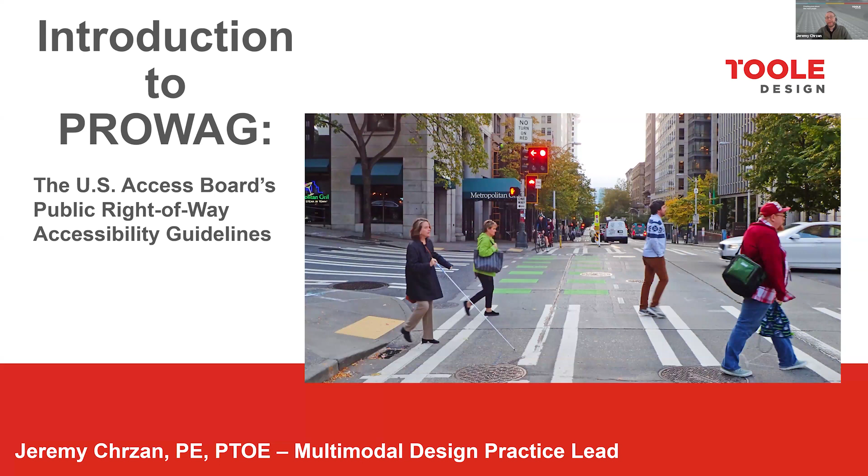So thanks for having me. Elise already said what I'm going to talk about, so I'll jump right into it. I'll start with the background, then give you an overview, dig into the details, and then talk about the relationship to the MUTCD. I think we have about a half hour slated for questions, so hopefully that's enough. If not, feel free to follow up with me afterwards. Happy to answer questions.

So the background. PROWAG is a weird acronym. It stands for the Accessibility Guidelines for Pedestrian Facilities in the Public Rights of Way. That's sort of a flipped acronym, which used to stand for Public Rights of Way Accessibility Guidelines, but that's where that comes from. PROWAG establishes the minimum accessibility guidelines for design, construction, and alterations of permanent and temporary pedestrian facilities that are located in the public rights of way. And some definitions there: pedestrian facilities refers to any structure, route, or space for pedestrian circulation or use. Public rights of way refers to any street, any highway, or an independent easement, such as where a shared use path would be located.

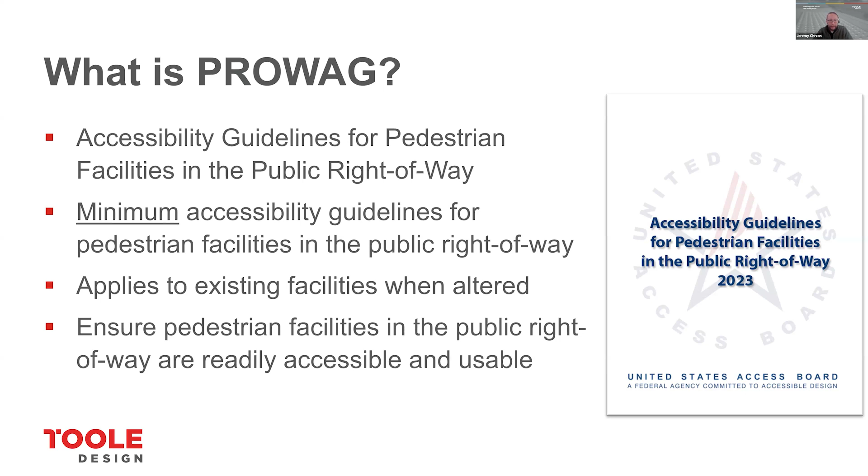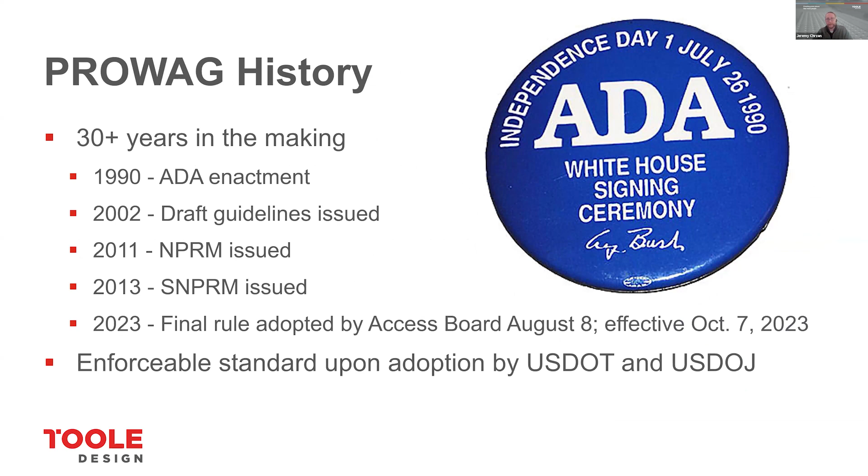So a little history here. The requirements for accessibility are long-standing. They date all the way back to 1973 with the Rehabilitation Act, which said that activities that received federal funding can't discriminate against a person with a disability. Then in 1990, we saw the adoption of the Americans with Disabilities Act, or ADA, which extended that requirement to all public facilities. Since 2002, there have been various drafts and versions of PROWAG that have been adapted and modified based on the public commenting process. In 2013, that was updated to include some guidance on shared use paths, and then it's taken all the way until August of 2023 when the US Access Board finally adopted the final rules for accessibility guidance.

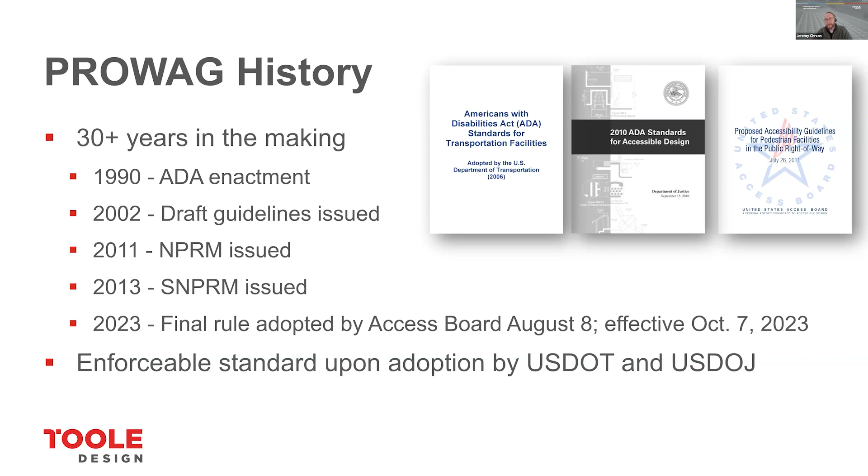It's important for you to understand that this guidance is only going to be enforceable once it's adopted by the US Department of Transportation and the US Department of Justice. What does that mean? It means that the DOT and the DOJ are the agencies that are tasked with enforcing accessible design guidance from the Access Board. Since those agencies have not yet adopted it, it's not yet enforceable. But in reality, we should all still be using PROWAG for our designs regardless of its enforceability, given that it represents the most current best practice for accessible design. Remember, accessible design is intended to address issues of discrimination against people with disabilities. So following PROWAG will help us to ensure that we're not discriminating as part of our designs.

So why does PROWAG matter? Well, it'll become the first national level enforceable design guidance for accessibility and the public rights of way. And to be clear, the ADA already mandated that streets needed to be accessible regardless of the presence of specific design guidance, but the adoption of PROWAG now provides that guidance to address accessibility.

And it's important to recognize that accommodating people with disabilities is not about accommodating a small minority of the population. According to the CDC, in 2016, at least 26% of the US population had a long-term disability. And beyond that, most of us will have a temporary disability at some point in our lives, whether it's a broken bone or recovering after surgery. There are a myriad of things that happen in the course of our lives that can give us a disability.

So if we're following PROWAG, we'll ensure that the public rights of way are going to provide equal access to jobs, education, healthcare, recreation, and all the other opportunities and experiences that we as humans need or desire. But PROWAG also benefits people who don't have disabilities. So for example, if we're providing curb ramps, that makes it easier for somebody pushing a stroller or deliveries using a hand truck to navigate between the street and the sidewalk environment.

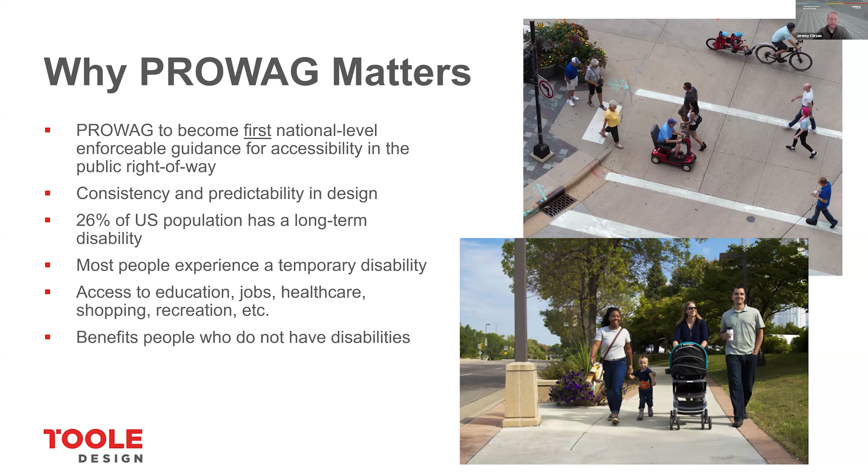So let's talk about what's actually in PROWAG. First, we'll talk about the structure of it. PROWAG is set up with the same structure that the previous drafts included. So those of you that had been using those previous drafts should be pretty familiar with it.

Chapter 1 identifies the purpose and applicability of PROWAG, its effects on existing facilities, and deviations from those guidelines. It also includes a lot of definitions and terms that are used throughout PROWAG, and it's worth noting that the Access Board added a lot of new definitions in the approved version. So it is worth reading those so that you understand the terminology that they use throughout the document.

Chapter 2 discusses the different scopes of projects, including new and altered facilities. It discusses temporary and permanent facilities. It's also where you learn about anything that's not covered in PROWAG, things like structures and other elements that might need to comply with the ADA or the Architectural Barriers Act.

Chapter 3 is where we start to see the details for facility design. And then finally, chapter 4 is supplemental details. So that's where you're going to find discussion about things like protruding objects, operable parts like push buttons, clear space requirements, things of that nature. So it's important to understand that the content from each of these chapters works together to ensure that we're addressing the noted guidance and the noted requirements.

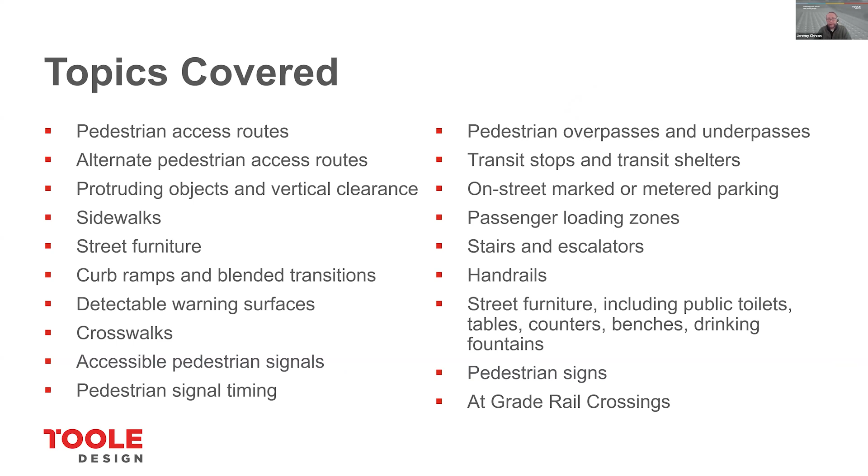But it's also important to recognize that PROWAG has been in the making for over 20 years, and there's been a lot of new innovations that are occurring in the public rights of way that are simply not covered in PROWAG. That includes things like the design of separated bike lanes, floating bus stops, shared streets or spaces, electric vehicle charging stations, and other new or less conventional street designs like flush or shared streets. They're not discussed in PROWAG. Quick build projects that use flex post curb extensions for pedestrian crossings are also not discussed.

And although they do provide guidance on the use of detectable warning surfaces, other tactile walking surfaces that are in use throughout the country are not discussed, things like tactile directional indicators or trapezoidal delineators. Also not discussed are the needs of people with intellectual or developmental disabilities. That's an important consideration that's simply not addressed in PROWAG. PROWAG mostly focuses on addressing vision and mobility disabilities.

Also not discussed is engaging with people with disabilities in the street design or street planning process. This is something that we've worked on a lot at Toole Design. Things like using tactile maps when you're engaging with people with a vision disability so that they can understand what we're talking about and provide meaningful feedback. The importance of leading public meetings and workshops with people with disabilities included and how we address their needs as part of those meetings. These are not things that PROWAG discusses.

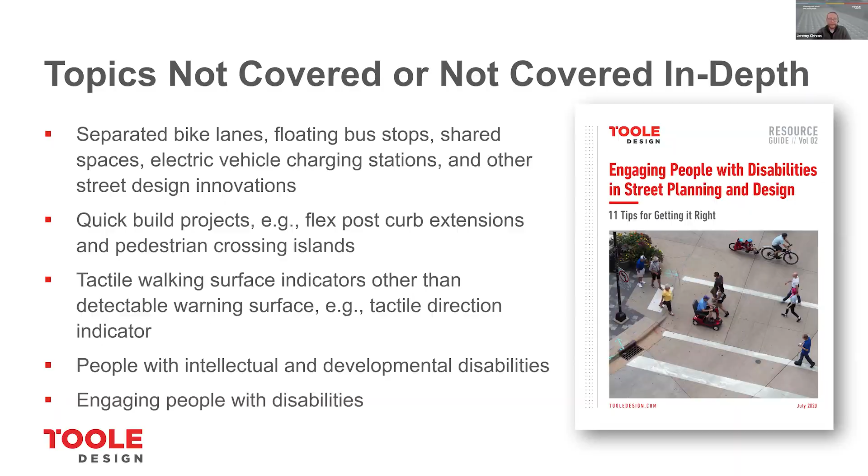All right, so let's get into the details. I'll focus on the key changes from the previous drafts to what was ultimately approved in the adopted version.

Let's dive in. In Chapter 2, the Access Board had received a lot of questions and comments about what constitutes a new construction project as compared to an alteration or an added facility. Those were terms originally used in the drafts, adapted from ADA guidance for accessible buildings, but those aren't terms that are easily applied to the public rights of way.

So the approved version of PROWAG defines new construction as any work on undeveloped land, things like a greenfield condition. In those cases, construction must fully comply with the accessibility guidance of PROWAG. The only exception for greenfield conditions is spaces used by service personnel, things like vaults or tunnels, which don't need to comply.

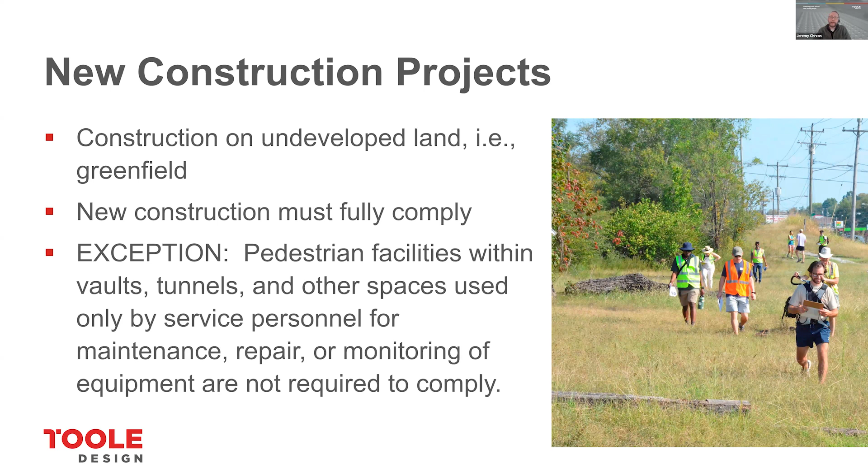For alteration projects, those are projects occurring on already developed land, meaning land containing buildings, pedestrian facilities, roadways, utilities, or other elements. For example, if we have a road that doesn't currently have sidewalk and we're adding sidewalk and curb ramps as part of our project, that project would be considered an alteration project.

In an alteration project, we're still expected to comply with all requirements of PROWAG unless there are existing physical constraints that make that technically infeasible. These can include things like underlying terrain, underground structures, adjacent developed facilities, drainage, or significant natural or historic features. It's worth noting that availability of existing right-of-way was previously listed as a potential physical constraint in older drafts, but that text was removed.

That means we might need to acquire right-of-way to build something fully compliant, and we need to do our due diligence to acquire that right-of-way or an easement to design in full compliance. And when we're not fully compliant with PROWAG, it's essential to document why that fully compliant design is technically infeasible, noting all the alternatives considered.

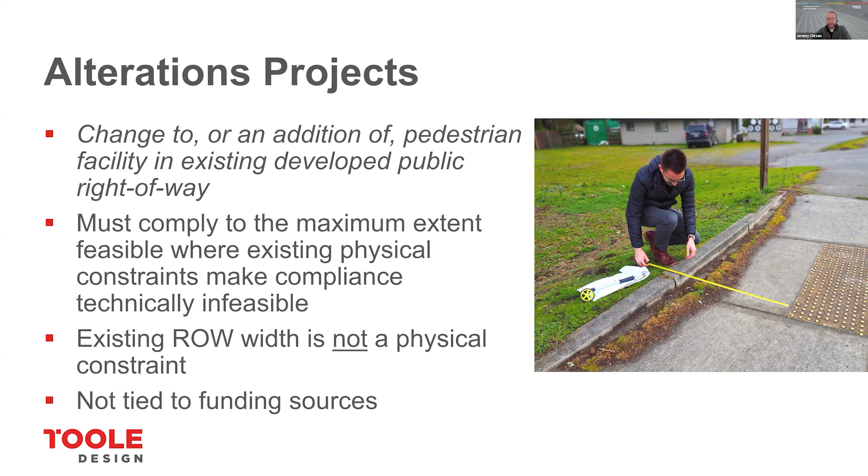I know a lot of DOTs have specific forms for documenting technical infeasibility with curb ramps, but really we should be doing that with all design elements that are not fully compliant with PROWAG.

Some other changes: the previous drafts included advisory statements. These were removed or otherwise incorporated as part of the design guidance. The issue with advisories is that although they provided useful information, they were not enforceable and therefore were ultimately removed from the final version.

The previous drafts also simply made reference to the MUTCD, but now content is directly added in PROWAG. For example, topics like accessible push button requirements at signals or requirements for alternate pedestrian accessible routes are now directly covered in PROWAG rather than simply referencing the MUTCD.

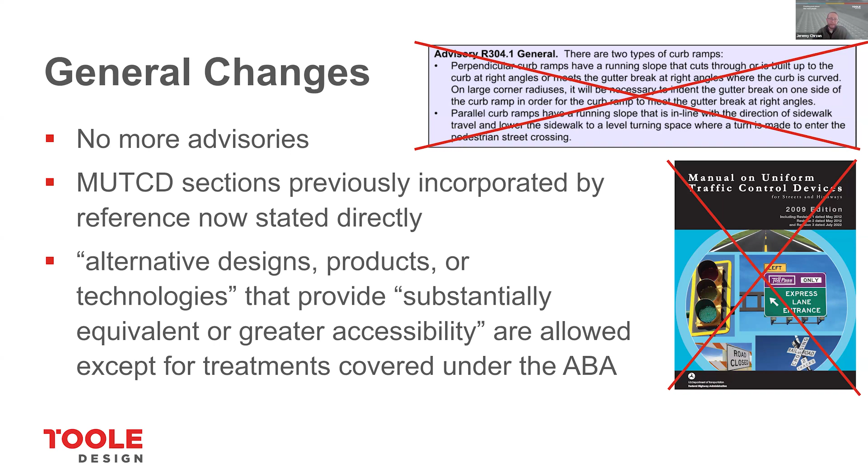The approved PROWAG also clearly specifies that alternative designs, products, or technologies that are substantially equivalent or provide greater accessibility are also allowed as part of PROWAG. Things covered by the ABA would require a waiver from relevant oversight agencies on those specific issues.

When we're designing work zones, pedestrian accommodations still need to be provided that offer the same widths and slope requirements as a permanent facility. So when doing a pedestrian detour, we need to be thinking about the widths and slopes of those alternate routes.

Although much of the updated content in PROWAG was pulled directly from the MUTCD, there was one significant change: the addition of a sign at decision points for pedestrian detours, noting that the sidewalk is closed ahead. The new requirement is that you need to provide passive detection, a motion-sensing activated sign that provides audible messages or some other non-visual form of communication at that decision point.

So while it's always common to put up a 'sidewalk closed ahead, use crosswalk' sign, now we have to have a motion-activated sign. The importance of this is because people who can't see can't read the sign, so they weren't previously provided sufficient information on how to navigate a pedestrian detour.

I know that's probably a new product many of you aren't familiar with, so I've highlighted on the slide that Minnesota DOT already has two approved products for this purpose, one with a push button and one that's motion activated. I've also heard there are a few new products coming onto the market in the next few weeks, so I expect this to ramp up now that PROWAG has been adopted.

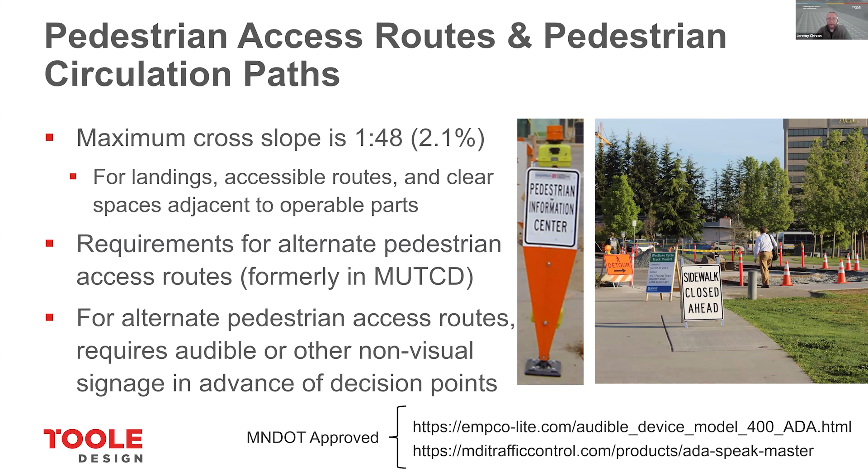PROWAG also provides guidance on the design of curb ramps, noting that you need to provide a curb ramp or blended transition for each crosswalk, including unmarked crosswalks, or you can provide a single blended transition that spans over both of those crosswalks on an intersection corner.

It clarifies that a landing is only required when a change in direction is occurring. For example, at the tops of some curb ramps where you're changing direction, you need a level landing. It also clarifies that a 4 foot by 4 foot clear area is needed at the bottom of a curb ramp, and it's important to recognize that those terms are different. A landing is different than a clear area. It's simply a space in the street that makes maneuvers in the street possible.

PROWAG also provides options for installing a transitional space at the bottom of a curb ramp or blended transition. That's specifically if the change in slope exceeds 13.3%, you basically need this 2 foot transition zone so that a person's footrest won't bottom out as they transition from the sidewalk to the street.

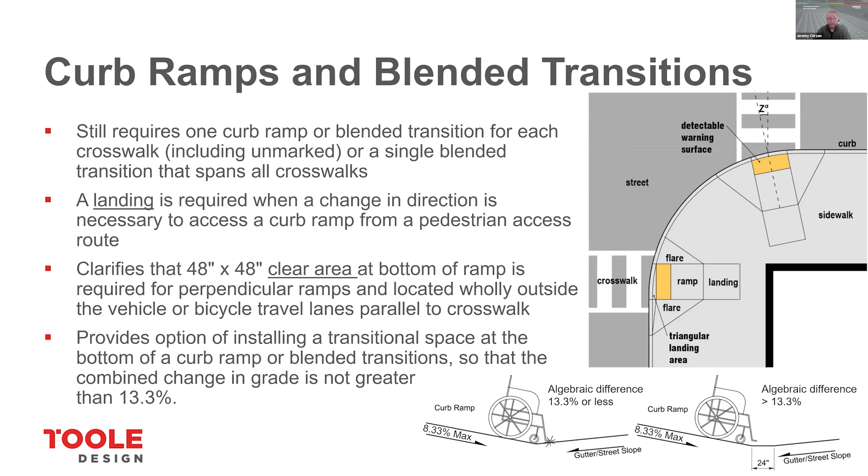So a landing is required where a pedestrian needs to make a change in direction, which facilitates their ability to make a turning maneuver. But there's some guidance in here that I think is a bit misunderstood. What PROWAG actually says is that the slope in the direction of the curb ramp needs to be 2.1% max. That 2.1% is actually a change from previous drafts, which originally only required a 2% slope - minor, but worth noting. But it also says that the slope in the direction perpendicular to the curb ramp simply needs to be less than or equal to the ramp cross slope.

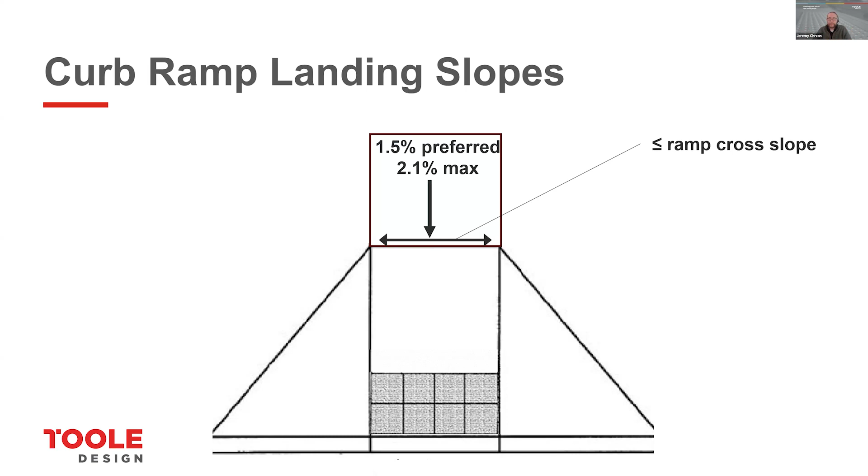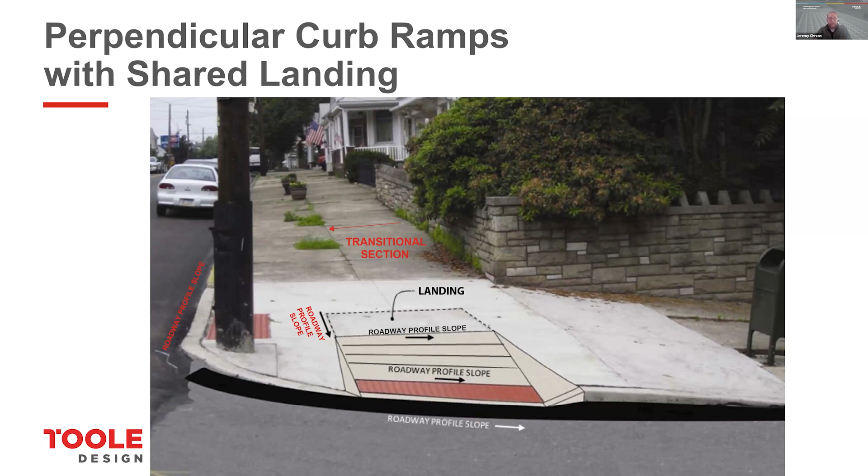Also recognizing that detectable warnings typically come as a rigid panel, so they also can't be warped on a curb ramp. This is a change from what many standard details show, so it's important for us to recognize that the landing should match the roadway slopes, and any transitional warping should occur as we make the tie-ins to the existing sidewalk.

PROWAG also provides guidance on the grade breaks for directional curb ramps, recognizing that they need to be perpendicular to the path of travel for a pedestrian. To accomplish this, we often need a triangular landing area at the bottom of the curb ramp that again can't exceed 2.1%. We will get into more discussion about detectable warnings shortly, but it's worth noting that for directional curb ramps, there's two different configurations.

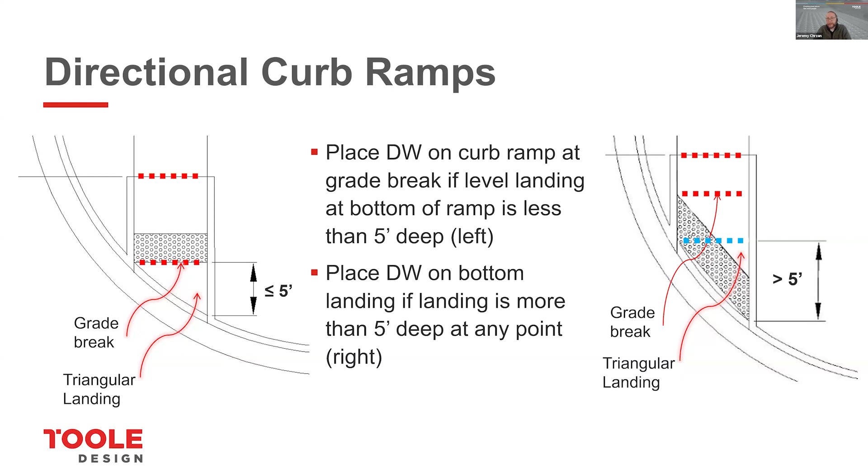PROWAG also provides guidance on the design of blended transitions. It notes that if you have a sidewalk that wraps around your intersection corner, we need to provide a bypass area that has a slope no greater than that 2.1%. That will allow a pedestrian to navigate around the intersection corner without having to interact with the blended transition.

And then finally, PROWAG says that a single diagonal curb ramp is only going to be permitted if two ramps or a blended transition are technically infeasible. Diagonal ramps have this problem that they don't align a pedestrian with their path of travel, and those designs require them to make a turn in the street that's not really desirable.

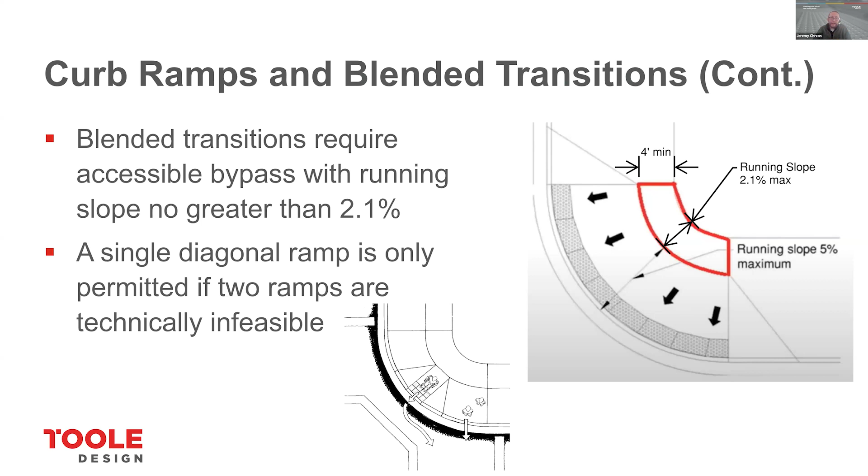Diagonal ramps also have their own challenges, since if and when you're providing them, the clear space that's provided at the bottom of that ramp must be outside the path of travel of any general purpose lanes or any bicycle lanes. So it's really hard to design them and be fully compliant.

Another change from the previous draft is the use of detectable warnings, specifically at stop-controlled driveways. It notes that if you have a driveway with a stop or yield sign, or it has a traffic control signal. If that condition exists, we need to provide detectable warnings across those stop or yield controlled driveways. I'll also note that there are many stop signs installed on low volume driveways that really aren't warranted. So as we're assessing and making revisions as part of an alteration project, we should also assess whether it's actually a higher volume driveway that warrants the use of a stop sign, and therefore is important to provide that detectable warning guidance.

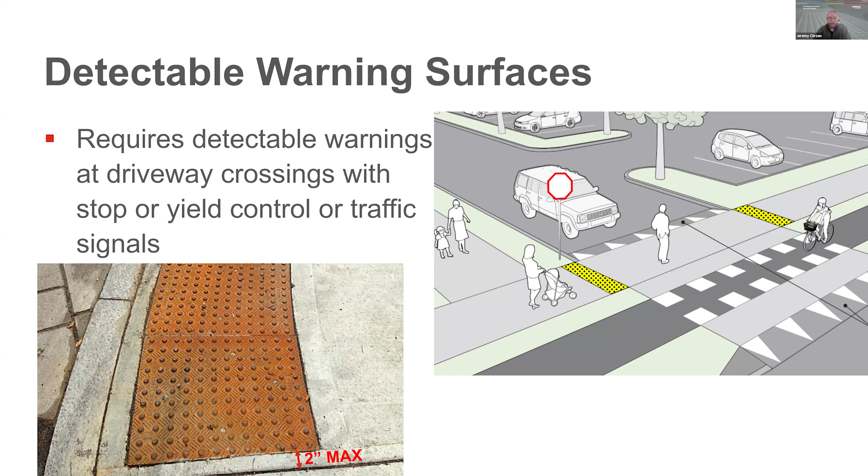Previous drafts also said that detectable warnings needed to cover the full width of a curb ramp when provided. However, they slightly modified this guidance to address issues of constructability, noting that we can provide up to a 2-inch concrete band on the edges of our curb ramps to ensure that the panels are appropriately set into the concrete.

Previous drafts of PROWAG also required the use of detectable warnings on all curb ramps, including those that access accessible parking or accessible loading spaces. In the previous drafts, it basically explained that detectable warnings are not a wayfinding tool, and they're simply used to warn a pedestrian that something is changing. However, the finalized, approved version of PROWAG changed this to now say that detectable warnings are not required.

Now, it's important to read that explicitly. It says they are not required, but it does not say that they are prohibited either. So as we're thinking about standardizing our designs, we need to ensure that we are applying a consistent approach, that either we are going to include them or we aren't, so that can be used throughout our jurisdictions.

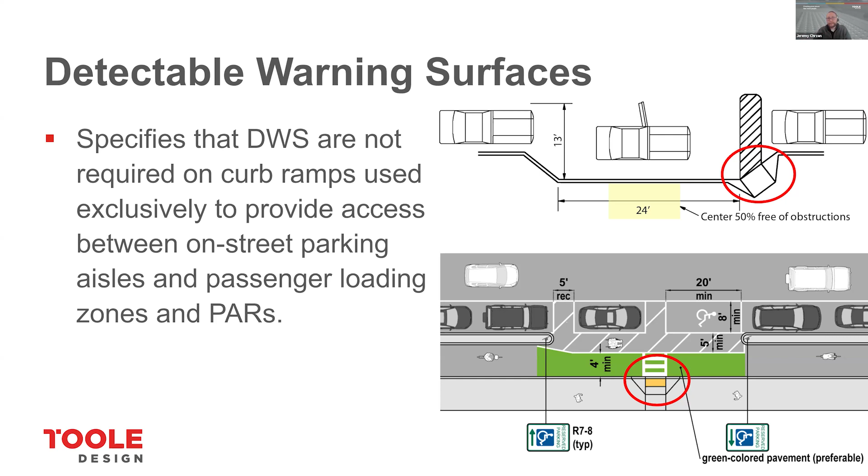For the guidance associated with accessible parking spaces, they also made some revisions here, noting that the dimensions of an accessible parking space need to be 24 feet long by 13 feet wide. In the previous drafts, it simply said that you needed to provide an 8-foot by 20-foot parking space with a marked accessible aisle.

If you read the preamble for the approved version of PROWAG, the Access Board explained that this change is to increase the spaces and account for the different uses of an accessible parking space - that essentially some users get out of the driver's side of their vehicle and therefore want to park close to the curb. Others are getting out on the passenger side and will park in line with other cars, and their accessible aisle is between the curb line and the vehicle itself. So by marking it as 24 by 13, it accommodates all the different uses, as opposed to in the past when some drivers actually needed to park in the marked accessible aisle.

PROWAG also says that you need to provide a 50% clear space along the curb, so that a vehicle that does need to pull up to the curb and deploy a ramp doesn't have objects like parking meters and things like that which would physically prevent them from deploying the ramp.

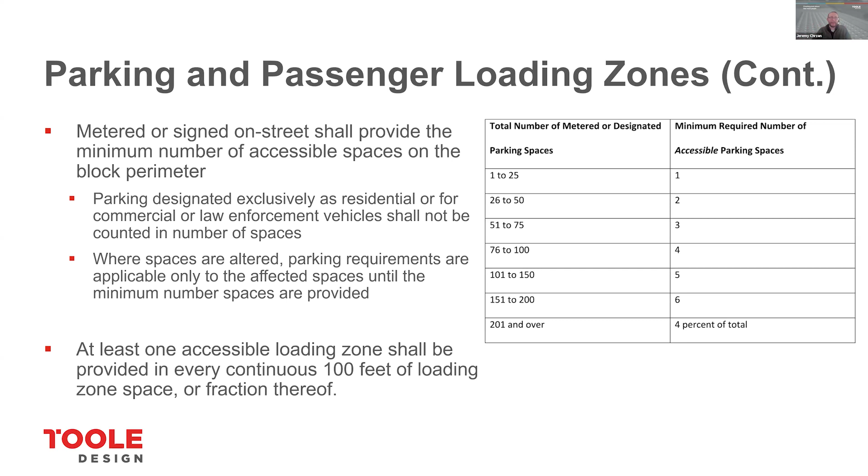Similarly, if we're only altering a parking space but not altering the curb and sidewalk environment, we're not required to provide that full 13-foot width. It's only on larger construction projects where we're disturbing both the street and the sidewalk that this width requirement applies. With regards to accessible loading zones, for every 100 feet of loading zone space, you need to provide one accessible loading space.

With regards to the design of crosswalks, PROWAG discusses requirements for both grades and cross slopes, and it's important to keep those terms straight since it can be confusing. The grade of a crosswalk is essentially the cross slope of your roadway and vice versa. PROWAG requires a 5% maximum grade for crosswalks, consistent with previous drafts. For the cross slope of a crosswalk, the design is based on the type of intersection: a 2.1% slope is required at stop or yield controlled intersections, and a 5% maximum slope is required at uncontrolled intersections, as well as intersections with signals or pedestrian hybrid beacons.

At mid-block crosswalks, we can match the slope of existing grades. These are the same numbers as in the previous draft, which is notable because the Access Board received a lot of comments on this 2.1% maximum slope requirement. In the preamble, the Access Board explained that 2.1% won't always be achievable based on project scope, but that as we're making changes to street grades, we should strive to comply with these slopes.

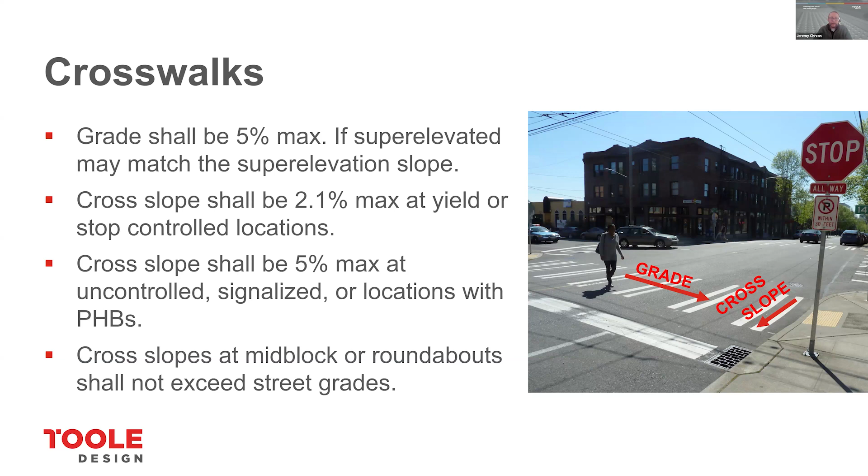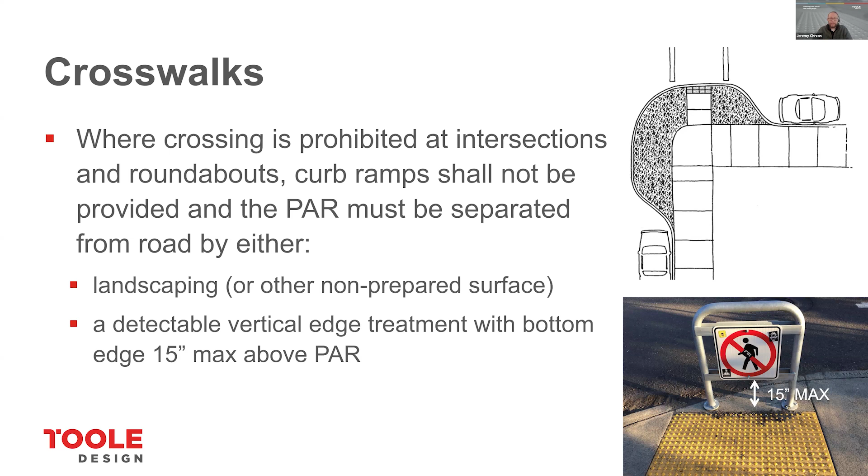This is a topic I was really eager to see where the Access Board landed in the approved version. Previous drafts for multi-lane roundabouts and multi-lane channelized turn lanes said those locations need a traffic control—a signal or pedestrian hybrid beacon. The approved version, however, acknowledges that the cost of installing signals at roundabouts would outweigh the cost and benefit of installing a roundabout, and therefore notes that one or more of the following treatments need to be provided at a multi-lane crossing: a traffic signal, a pedestrian hybrid beacon, a rectangular rapid flashing beacon, or a raised crosswalk.

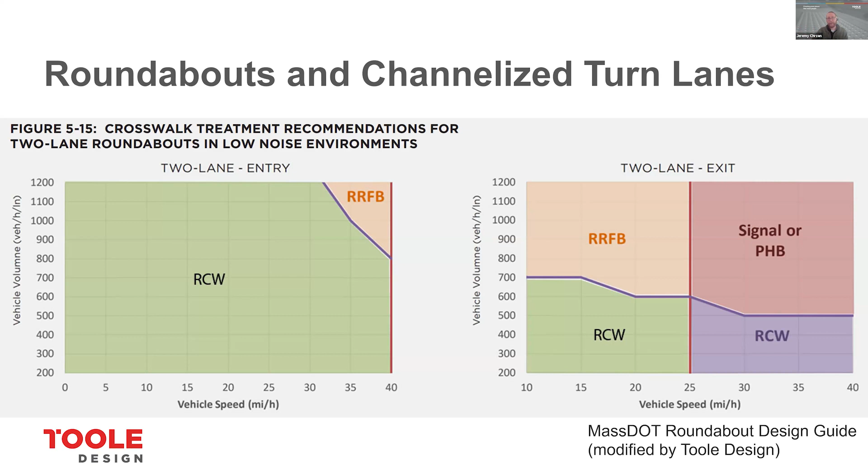With regards to accessible signals, PROWAG notes that push buttons are required at all traffic signals that have pedestrian signal heads—so things like traffic signals or pedestrian hybrid beacons. Previously the requirement for push buttons was optional, but it's now required anytime there's a pedestrian signal head. These push buttons need to include audible and vibrotactile information, must include a locator tone, and must include a contrasting tactile arrow that aligns with the direction of the crosswalk.

Push buttons are still required even if you have passive detection or pre-timed signals. This is to ensure that we're able to communicate both the audible and vibrotactile information that these push buttons provide. The requirement for these push buttons is tied directly to the provision of a pedestrian signal head. This doesn't mean don't install the PED signal head so we don't have to install the buttons. Doing the right thing means installing both the pedestrian signal head and the corresponding push button.

The Access Board did not provide any guidance on what actions trigger the installation of an APS push button, noting that it's governed by the same alteration requirements as any other pedestrian facility. I'd expect that either the DOT or DOJ may provide more guidance on what constitutes an alteration that triggers the need for adding APS push buttons. In general, those past triggers were based on the scope of work of our project, so I expect to see some guidance on that in the future.

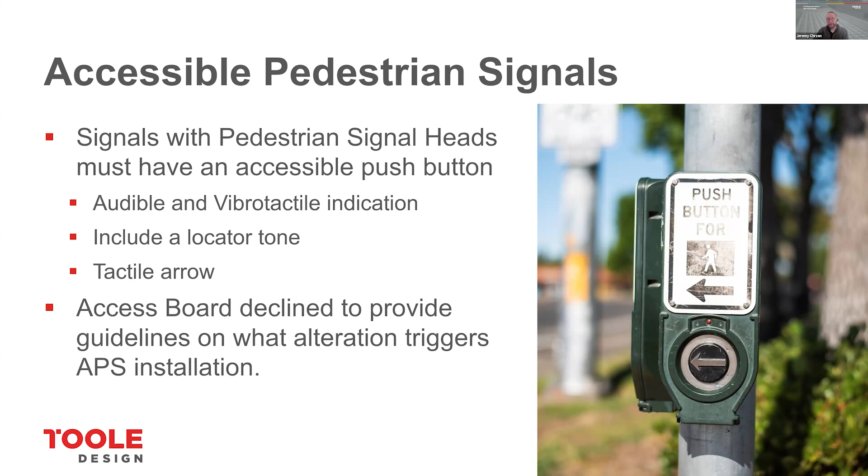For things like rapid flashing beacons or other types of beacons, PROWAG notes that they still need to include push buttons or passive detection to activate the flashing lights. However, the audible messaging for these locations is different, simply noting that flashing lights are on, whereas for a signal or pedestrian hybrid beacon, it's telling you that the walk sign is on. Another important distinction is that these locations shall not include vibrotactile information, because people who rely on that vibration are being told that the walk sign is on. In the case of an RRFB or other beacon, there is no walk sign, so we can't provide vibrotactile information.

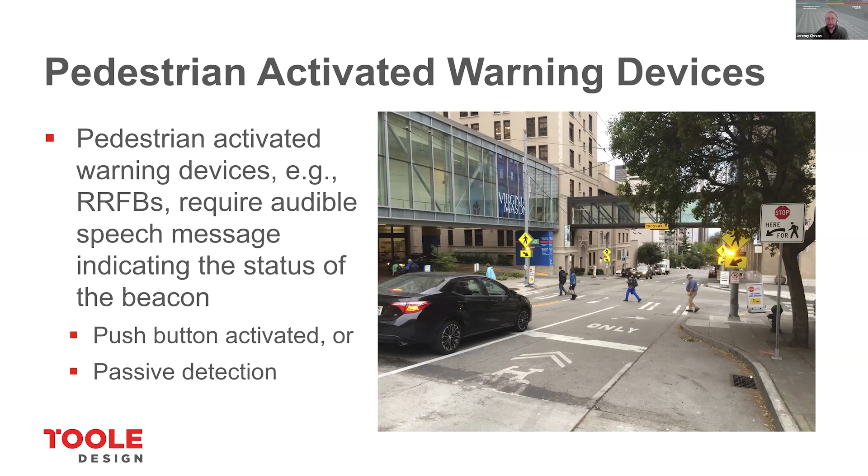For transit stops, PROWAG requires that if we're altering a transit stop during construction or maintenance, you need to provide an alternate transit stop location. All the other guidance from previous drafts remains the same. In short, you need accessible boarding and alighting areas that connect to an accessible route and to a transit shelter or bench if those are provided. It's still important that boarding and alighting areas and boarding platforms shall be connected to existing pedestrian circulation paths by a pedestrian accessible route. If I'm reading that correctly, it means bus stops can't drop you off on a concrete pad that doesn't connect to a sidewalk environment. So it's important for us to think about this in our alteration projects to make sure our transit stops are truly accessible to people with disabilities.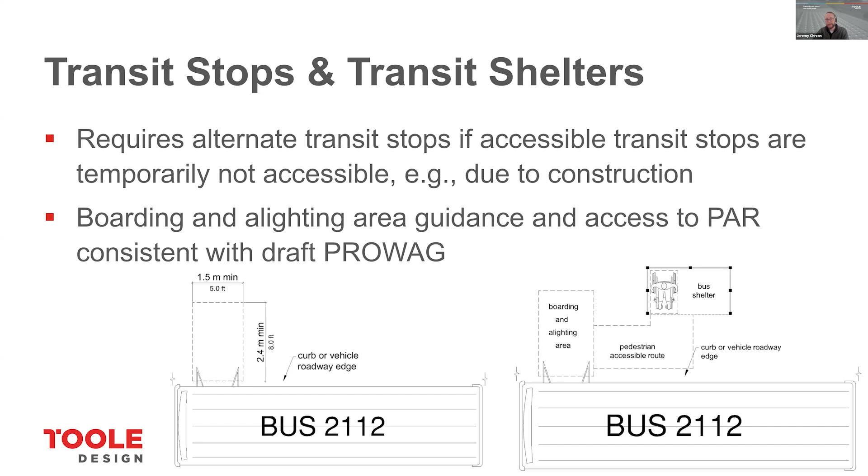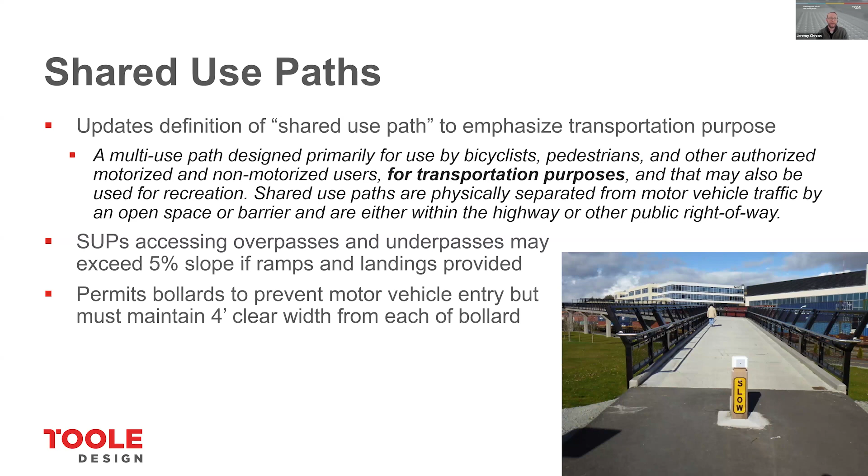For the design of ramps and stairs, it's important to recognize that ramps are different than curb ramps. They're allowed to have a rise of up to 30 inches, and then you need a landing. Essentially that amounts to a 30-foot ramp designed at the full 8.33% before you would need to introduce a level landing. All of this guidance is consistent with the previous draft.

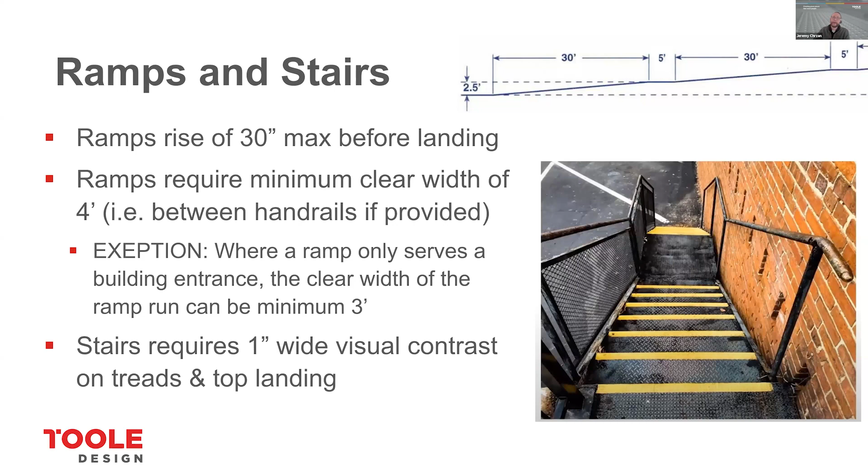For the design of stairs located in the public rights of way, this largely remains unchanged, except that they added a requirement that the leading edge of a stair tread and the top landing need to be marked with a stripe that's at least 1 inch wide, and needs to contrast visually with the material of the step—so either dark on light or light on dark for those markings.

So next we'll talk about some of the requirements for pedestrian access routes.

So some definitions again. Pedestrian access route refers to the accessible, unobstructed path of travel used by pedestrians with disabilities, and that's generally contained within a pedestrian circulation path. The definition of pedestrian circulation path is a prepared exterior or interior surface provided for pedestrian use in the public right-of-way. Looking at the image on the right, the access route is the middle of the sidewalk, whereas the furniture zone and frontage zone are not part of the accessible route, but they are part of the pedestrian circulation path because they are intended for pedestrian use.

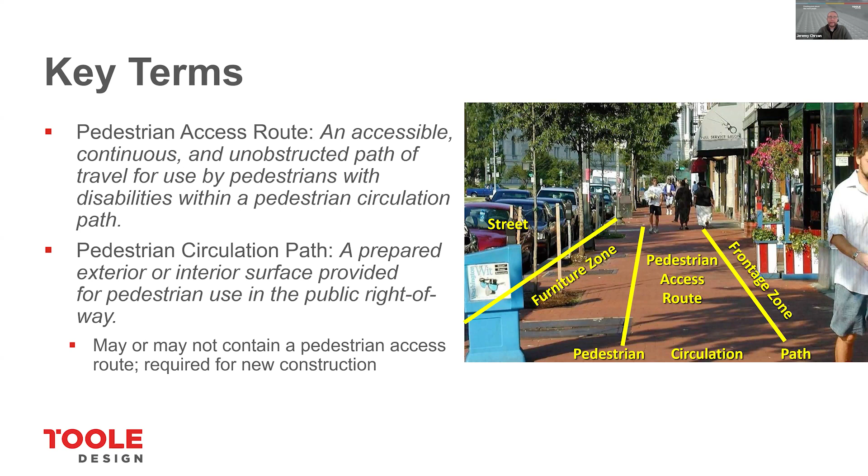With regards to project scoping, PROWAG talks about how pedestrian facilities must contain or connect to an access route, and then again provides that pedestrian facilities include all of the things shown here on the slide: sidewalks, curb ramps, crosswalks, overpasses, etc.

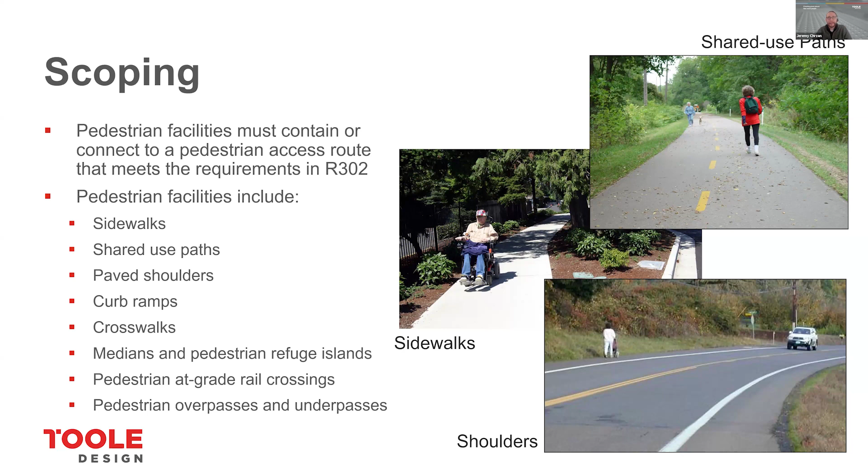This isn't actually from PROWAG, but I think it's worth noting. The need to build sidewalks is not required in the ADA. It's only required as best practice. Paved shoulders are not a suitable accessible route in a suburban or urbanized area, but sometimes are considered the pedestrian accessible route in a rural area.

I'll also note that the location on the right shows a sidewalk in the distance, and then there's obviously a worn path. So clearly this is a place where people are walking, but those with disabilities are not provided equal access here. So it's important to be closing these sidewalk gaps as part of our projects.

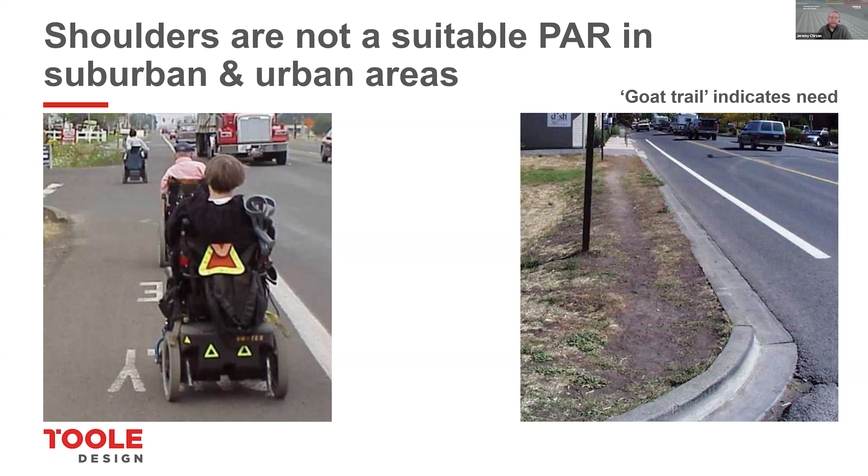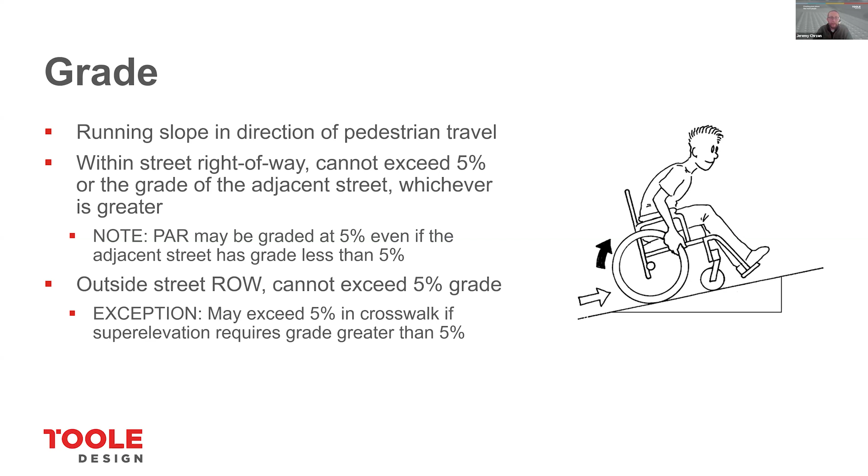With regard to grade, it notes that the running slope in the direction of travel can't exceed 5%. And then outside of the street right-of-way, things like a shared use path, again we can't exceed the 5% slope requirements. The only exception to this is when the adjacent street grade exceeds that, in which case we're allowed to match the slope or grade of that adjacent street.

For cross slopes, I noted before that the maximum cross slope was changed from 2% to 2.1%. And the only exception for this for access routes is that the slope in the street at an accessible parking space doesn't need to meet that requirement. It's going to match the grade and slope of your roadway.

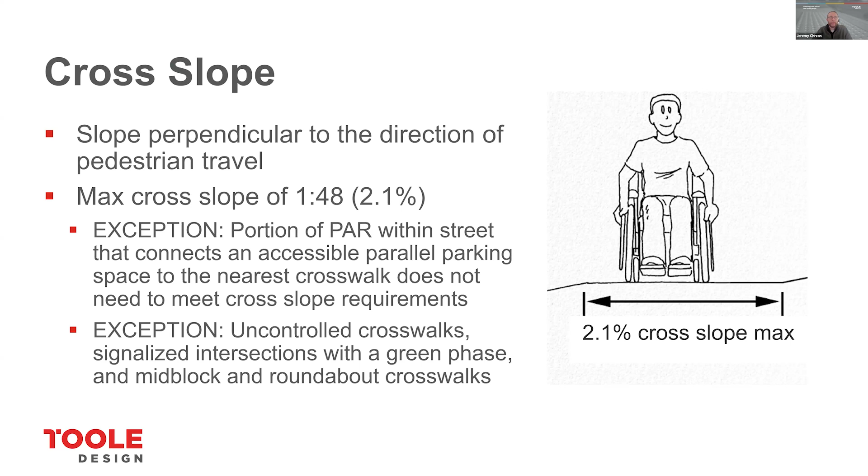With regards to the surface of accessible routes, PROWAG notes that the surface needs to be firm, stable, and slip resistant. Typically that's going to mean installing concrete or asphalt. Yes, you can still use brick or flagstone, things of that nature, but it's going to require proper installation, like installing it on a concrete base so it doesn't have differential settlement. And it's also going to have more maintenance requirements to ensure long-term accessibility.

Other surfaces like a beveled or pillowed paver are not going to work because they're going to be too rough or uncomfortable to roll over. And then similarly, we want to avoid designs that have lots of exposed aggregate in our concrete because that can be really rough for somebody using a wheelchair or other wheeled mobility device to navigate over.

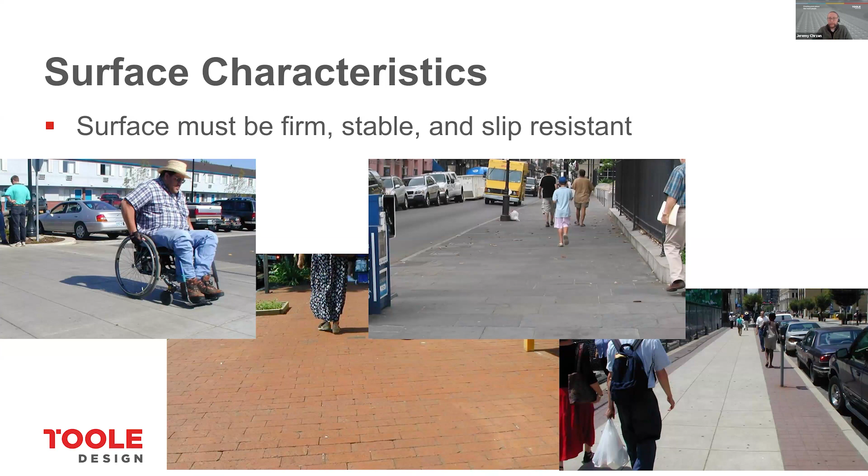With regard to grade breaks, PROWAG notes that at the bottoms and tops of curb ramps, those transitions must be flush, so you can't have any kind of lip at the bottom or top of a curb ramp. But on existing sidewalks where we do have some settlement and we're doing sort of a grinding off the edge activity, PROWAG requires that if that lip is between 1/4 and 1/2 inch, you can bevel it. If it's between 1/2 inch and 6 inches, then you're basically designing it as a ramp with 8.3% max. And then if we're exceeding a 6-inch rise, then we have to treat it as basically the same requirements as an accessible route, so a maximum slope of 5%.

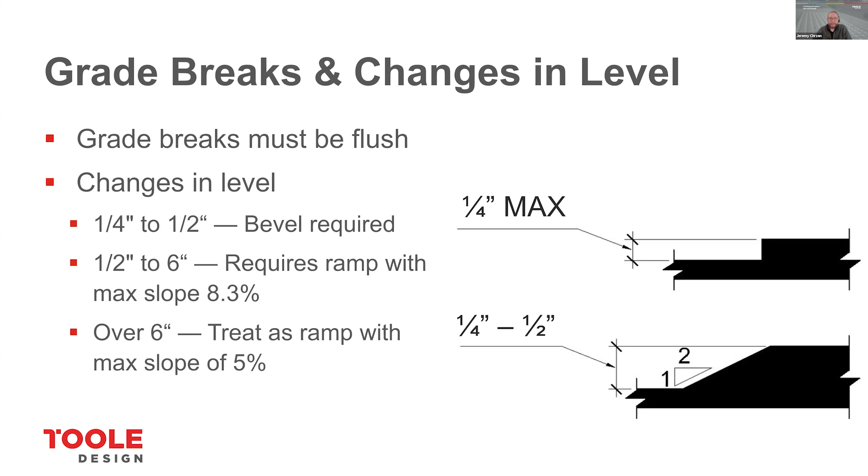For horizontal openings, things like grates, nothing substantially has changed here. Essentially, it says that you can't have more than a 1/2 inch gap in an accessible grate. And then there was some updated guidance on gaps at railway flangeways, noting that the range is from 2.5 inch gap to 3 inch gap based on whether that track is governed by the Federal Railroad Administration or not.

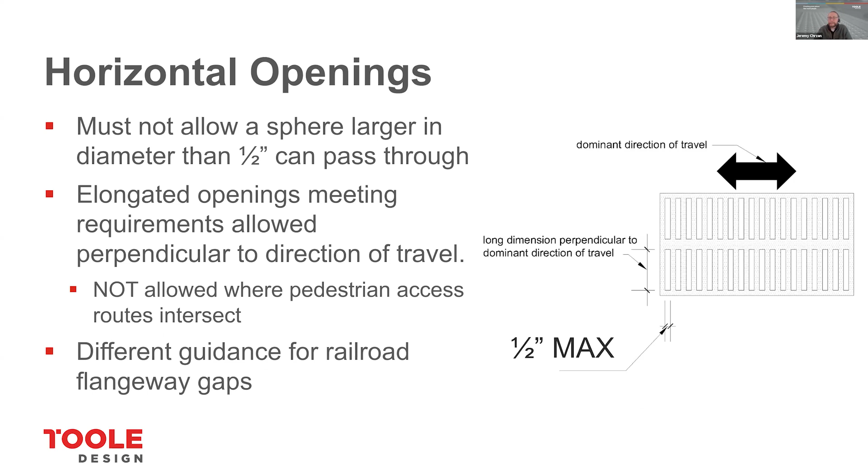Getting to the end on this topic, PROWAG discusses the design of protruding objects. There's not much that has changed from the draft on this one, except that the board provided a provision to clarify that protruding objects may not reduce the clear width of an accessible route. So essentially, protruding objects should be located in a pedestrian circulation path, but not necessarily within the pedestrian access route. As part of this, it provides the requirements for the dimensions. Objects that are 27 inches to 80 inches above the ground can't be detected with a cane.

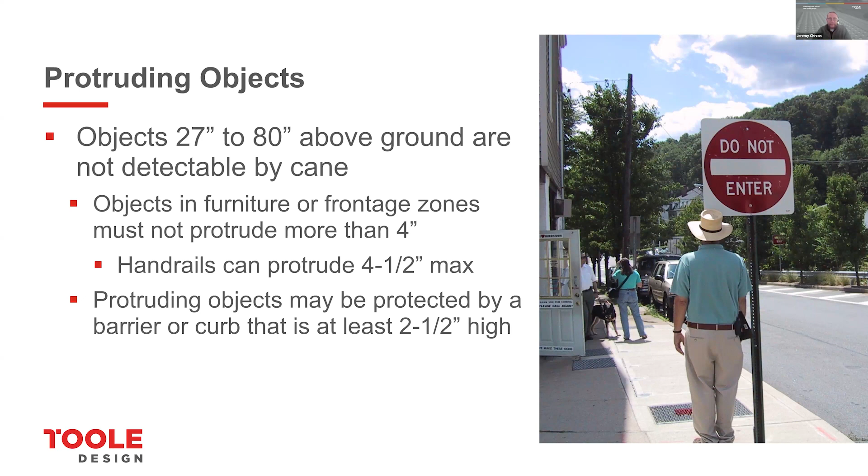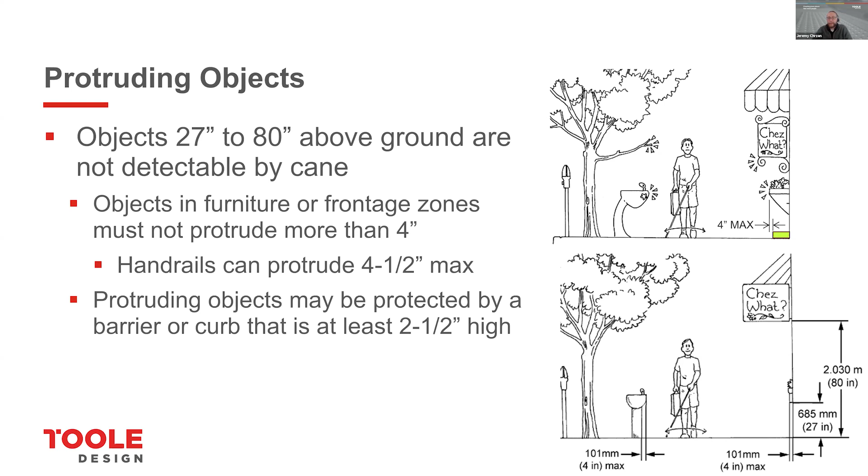If we're thinking about this design of frontage zones and the buffer between a sidewalk and the roadway, we need to be thinking about the design of these protruding objects. You can see the image on the top has some planters and signs that somebody would bump into and not detect. Similarly, the way the water fountain is designed would not be detectable to a person using a long white cane. So there are some changes we could make to the image in the upper right. If we installed another planter box or some sort of curb beneath that planter, as long as that planter doesn't protrude out more than 4 inches from the edge of that newly constructed planter or curb, that would help make it more detectable and comply with the requirements of PROWAG.

So then what about the relationship of PROWAG to the MUTCD? For those of you not familiar with the MUTCD, that's the Manual on Uniform Traffic Control Devices. It's a guide released by FHWA, Federal Highway, and it covers the use of signals, signs, and pavement markings, telling us how they look and under what conditions we can and cannot provide them.

The previous edition of the MUTCD was last released in 2009, so this has been a revision a long time coming. The 11th edition was adopted in December and officially became effective in January. So now the clock is ticking for states that either need to adopt this guide outright or release their own version or supplement that's in general conformance with the federal guidance.

But it's important to recognize that the MUTCD was published only 4 months after the release of PROWAG, and so naturally they didn't get everything updated to be in compliance with PROWAG. So there are some discrepancies between the MUTCD and PROWAG, and this is going to create a problem when the MUTCD's guidance is less stringent than what's required by PROWAG.

An example of that would be the placement of pedestrian push buttons. This figure shown on the slide is a modified version of what's in the approved MUTCD, and it identifies that you can locate a push button as far away as 10 feet from a curb ramp—basically anywhere in zones A, B, or C shown on the slide. By contrast, PROWAG says the maximum distance is 5 feet from a curb ramp. So if we followed the MUTCD and placed a push button in zone C, that would not be in compliance with the requirements of PROWAG.

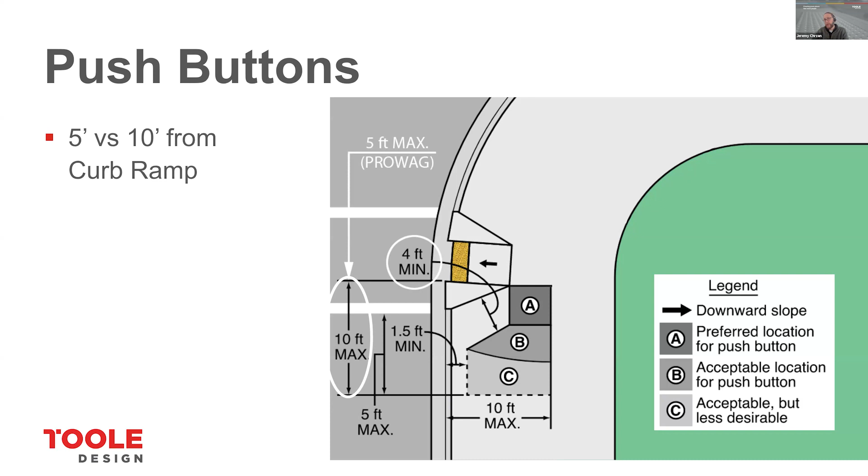I'm also highlighting the 4-foot dimension that they're labeling, and you can see it's labeled perpendicular to the flare of the curb ramp. That guidance is more stringent than what is required by PROWAG. So taking what I'm seeing in PROWAG and what I'm seeing in the MUTCD, this graphic better illustrates how and where push buttons can be installed to be in compliance with PROWAG. Locating it in zone A, or a portion of what the MUTCD referred to as zone B, is really where push buttons need to be located.

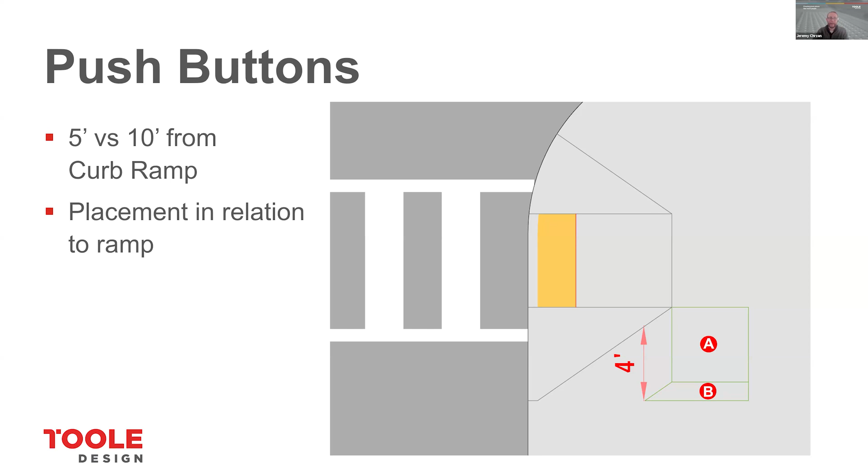I'm also noting that that 4-foot dimension really only needs to be measured perpendicular to the direction of our crosswalk. Essentially, a person does not need to get in between the push button and the ramp flare as though it was an accessible route, and instead just needs to have that push button within compliant reach as defined by PROWAG.

I can illustrate that concept by looking at the old figures that were in previous drafts of PROWAG. Unfortunately, PROWAG did not include figures like their previous versions have included. Speaking with people from the Access Board, they did say they are going to add figures to help illustrate some of these concepts. But if we look at these old figures, you can see the push buttons are depicted as being located in the upper corner of the curb ramp, and you'll note that the landing for that curb ramp is within an accessible reach of the push button. So again, what we're seeing in the MUTCD for the placement of push buttons has some elements that are more stringent and some elements that are less stringent.

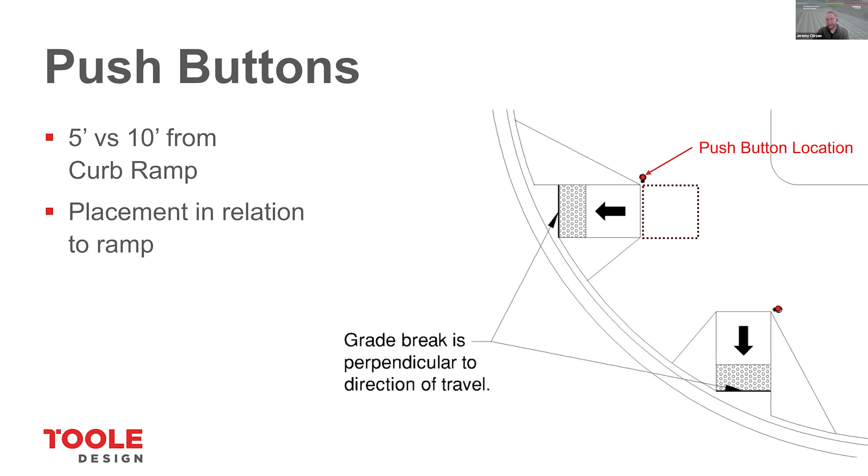The MUTCD also provides guidance on the design of push buttons, noting that they should be activated by no more than 5 pounds of force. By comparison, PROWAG considers this 5 pounds to be a requirement that shall be complied with. And while these discrepancies might be minor, I think it's important to get this right and use the same language, that these shall be activated by no more than 5 pounds of force. Now, in this particular case, manufacturers know the requirements of PROWAG, and I don't think this is actually an issue, but I think the documents should actually align.

So there's some other discrepancies. For example, when a traffic signal gets placed in flash mode, which often happens at night, PROWAG notes that the pedestrian push button locator tone shall remain active and that the speech message should communicate that the signal is operating in flash mode. Because you won't get a walk sign, the vibrotactile function would need to be deactivated. If we look at the MUTCD though, it states that push button locator tones shall be deactivated when located in flashing mode.

So there's a discrepancy there between whether the locator tone should be on or off. This discrepancy is particularly problematic because compliance with either is technically infeasible in a lot of cases. Not all push buttons get connected back to a cabinet, and the ability to differentiate whether the signal is operating in flash or not isn't always possible. So this is an area that will need to be coordinated with manufacturers, as well as coordinating the guidance between these two documents.

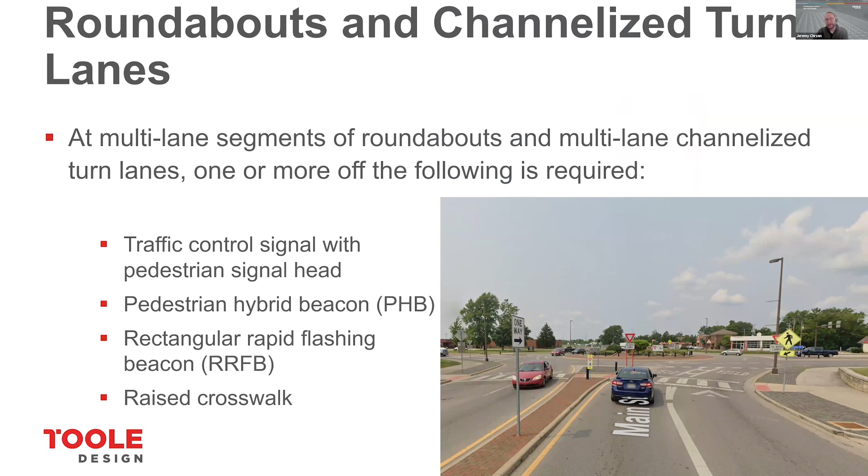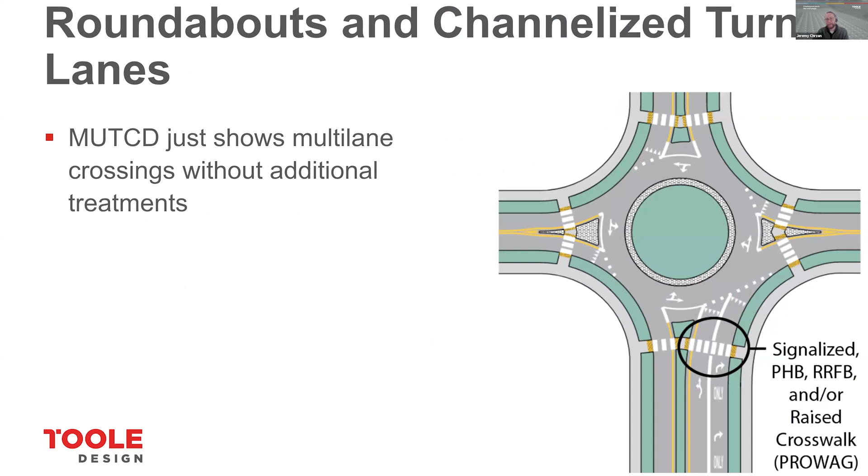Again, the approved version of PROWAG notes that we need to have one of these countermeasures at a multi-lane roundabout or multi-lane slip lane. By comparison, the MUTCD doesn't provide any of that guidance and shows multi-lane crossings without any of those treatments. So again, something that needs to be updated between those two documents to ensure that they align.

And then finally, the MUTCD mentions that pedestrian detours need to be accessible, but notes that you should provide these audible signs at pedestrian detours, as opposed to what PROWAG says, that you shall provide those treatments. So again, it's just something to be thinking about.

And if your state is planning to do an update or a state supplement or your own version of the MUTCD, these are some of the minor things that could be edited to still be in general conformance with the federal version, while also aligning your guidance with PROWAG.

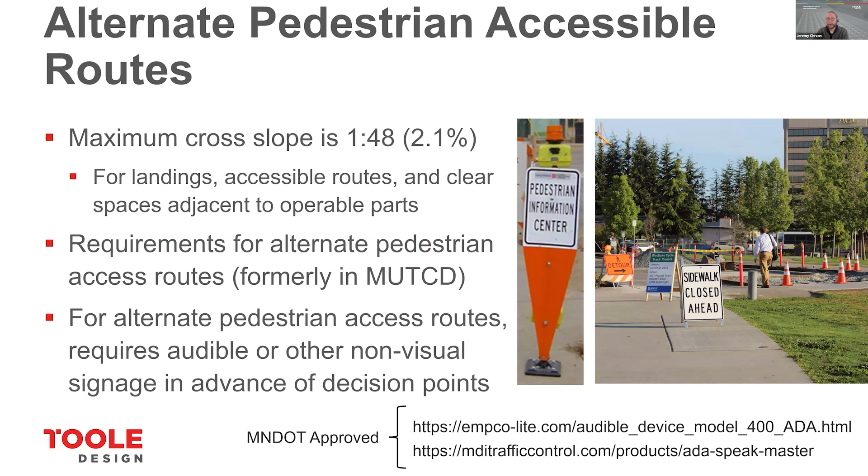And then finally, I'll note that there are some things that the MUTCD did that got out ahead of the guidance in PROWAG. So I mentioned that PROWAG doesn't mention the design of flex post curb extensions or those types of quick build projects. By comparison, the MUTCD does, and shows that you can either keep your detectable warnings back at the curb lines, in which case you need to mark your crosswalk through your curb extension, or you can bring your detectable warnings out to the edge of your painted curb extension. In those cases, you would only mark the crosswalk between those detectable warning panels.

So just a quick wrap up here. As a reminder, PROWAG simply provides the minimum standards. We can and should go beyond those minimums. A good example of that would be PROWAG allows you to have a 4-foot sidewalk as long as a 5x5 passing area is provided every 200 feet. While that's technically accessible from PROWAG's perspective, it's not really.

If a person in a wheelchair has to wait for a full minute for another person in a wheelchair to get to them to be able to pass, it's not the same experience that those of us who don't have a disability have to deal with as part of navigating the public rights of way. Again, PROWAG is not comprehensive, so there are lots of these innovative designs that are not covered.

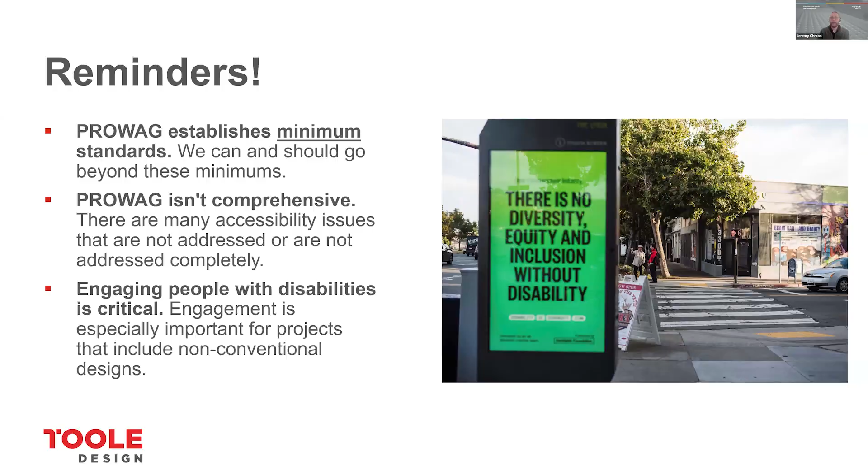And so that's why it's also important to be engaging with people with disabilities, particularly if we're doing innovative designs or things that are not covered in the guidance, so that their needs are being considered as part of the design process. And with that, I think I finished right on time, and we still have 30 minutes for questions.

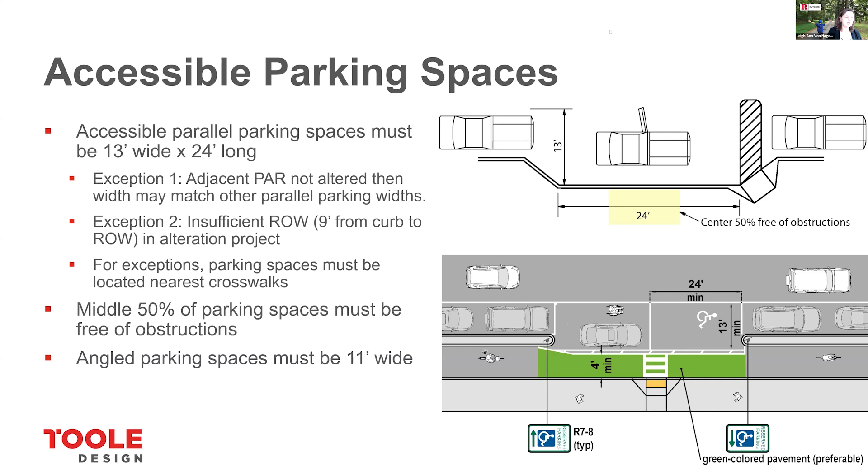All right, and then our last question, so while you have your slides up, is specific about trapezoidal delineators. Can you explain what those are a little bit more? It seems like there are several different types of examples of that.

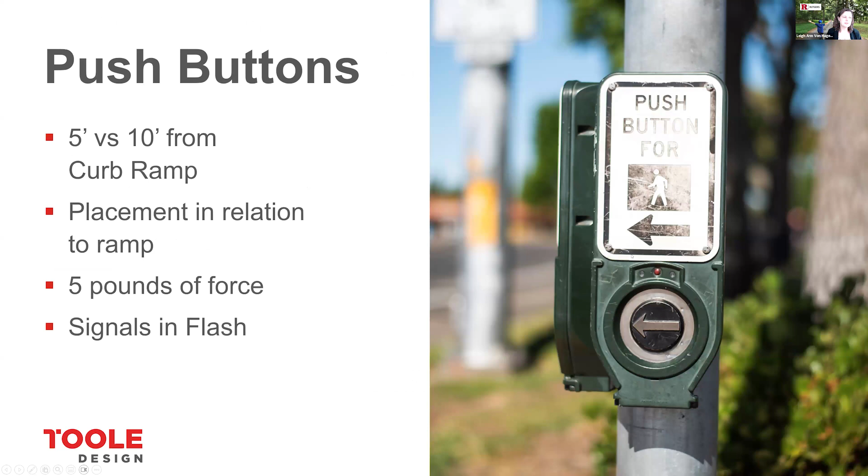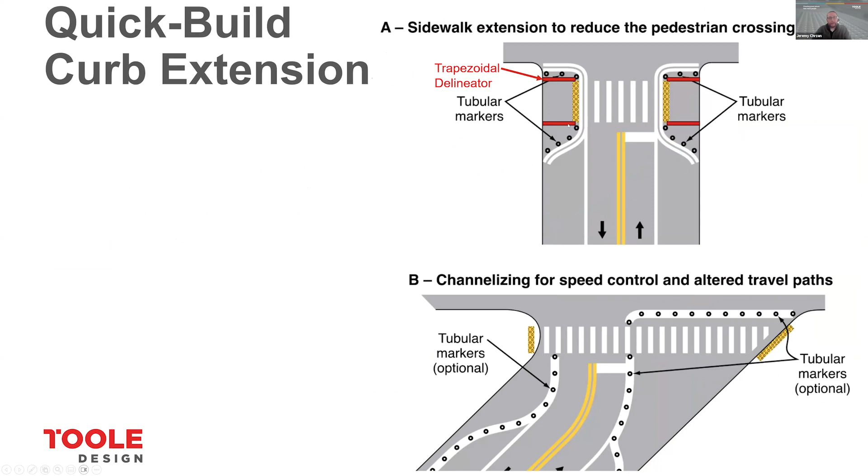Yeah, so I was showing those on the last slide I covered, and essentially they would be installed guiding you out to the detectable warnings. While we were talking, I pulled up a website showing what that looks like—it's essentially a plastic curb. It is not intended to be traversed by a person with a disability; it sort of defines the edge of an accessible route.

They are traversable, just not accessible to traverse. By that, I mean the slopes and heights don't meet PROWAG requirements for an accessible route, but most people using a wheelchair would be able to get over them if they absolutely had to. So these are recommended along those edges so a pedestrian can be guided out to the edge of the crossing, and not inadvertently veer through your painted curb extension, find their way through your flex posts, and end up out in the street without being aware of it.

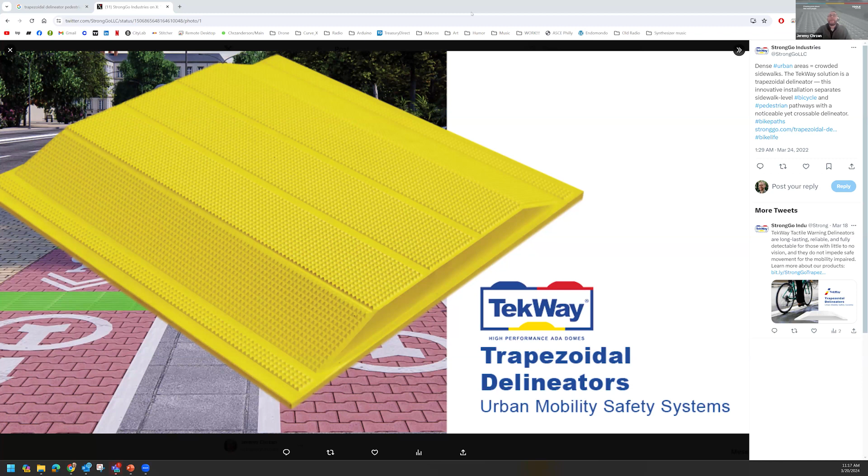That's based on some research that's being done right now, or is wrapping up, from Federal Highway. I'll put the information on that project in the chat. It's not a project we're involved with, but it's being led by a company called Accessible Design for the Blind. I believe they're finished with the research and are just finalizing the recommendations now.

It's project 2149. We have a lot of municipalities and counties that have gotten some of the SS4A funding and will be looking at doing demonstration projects. So I think we'll need to do some of our own research and homework to help them identify how to better make them accessible when they do quick builds and demonstration projects. Do you know of any other further guidance coming out that we should be looking towards for that?

My understanding is FHWA is working on accessibility and quick builds or demonstration projects. I saw something at TRB this year in January, and they said something about having some sort of guidance during the winter of 2024. Since we just hit spring yesterday, I still haven't seen it, but maybe it's out there. I think this will be a continual part of the discussion as we do these demonstration and quick builds, which are important to figuring out next steps with infrastructure. Making sure they're accessible to all is a big part of the discussion.